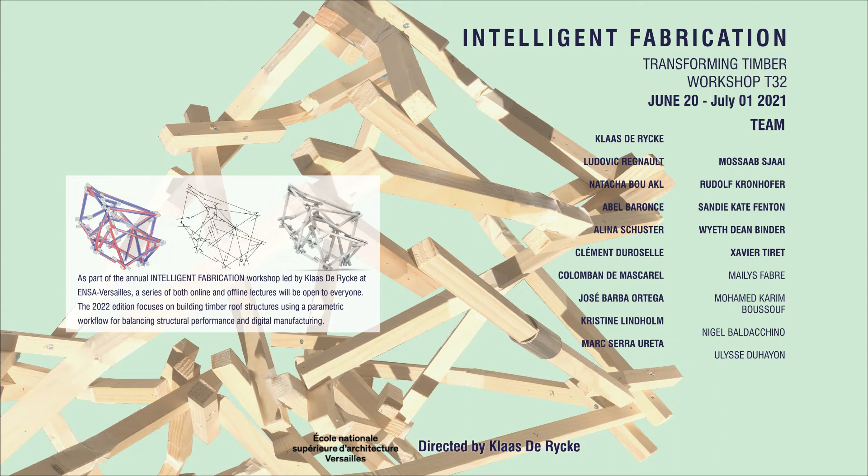This. Good morning. So let's see. Cool. You guys see it already. That's good. And now I think I have to share my screen. You have to stop sharing there. Yes. Yeah, that looks good.

Maybe can I ask you? It's the last session, so normally there's a good trick. What I do when I go to a conference is I always need to think that I have at least one question. It makes me stay awake during conferences, actually. So it's just a good trick, and try to have one.

I think it can be interesting for the last one that we have a little bit of debate about also different lectures maybe that you have seen now about the transforming timber. And it went from very detailed, people that are working on the timber itself with a factory and what challenges they see ahead, to the very intellectual approach on timber, and even the ones from carpenters, how they see the evolution of timber at the moment. So I think there's quite a lot of aspects, and I think you will also see it back in some of the reflections that Oliver can bring us today.

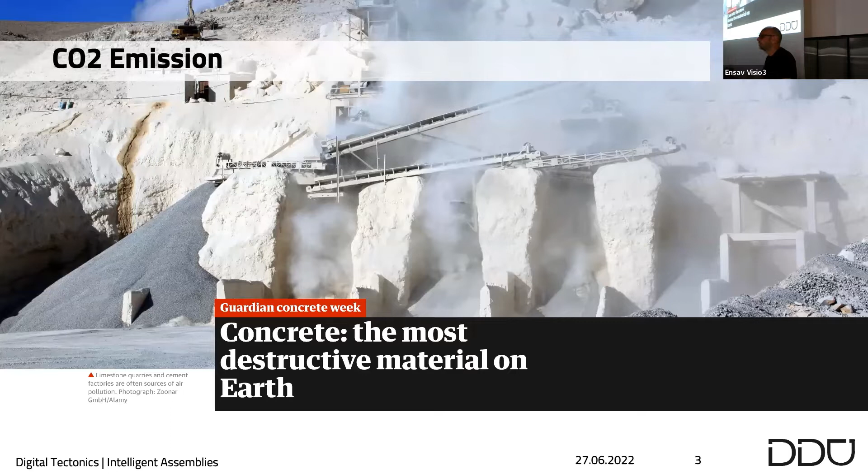So our discipline, the architecture and the construction industry, are key in how the future will unfold. And this also becomes more obvious in mainstream media. People are discussing that, and you have been working with timber in the past 2 weeks intensively, and it makes a lot of sense if you read that headline from The Guardian from 2019 already. I would like today to talk about the use of concrete as well, but how we can maybe find different ways of using concrete, of reusing concrete, and how a modular design and fabrication strategy can help to keep material and building components in the loop.

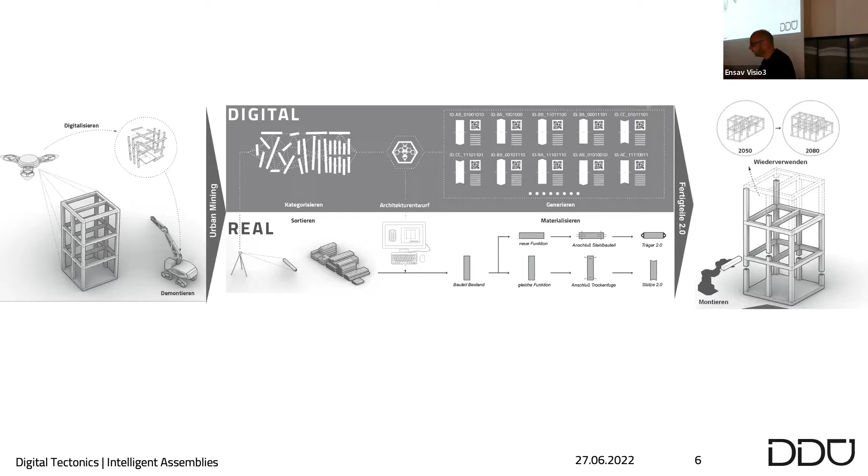What we do at university is we write grants to get money to do research. We proposed this idea, and while waiting for a committee to decide whether we get that grant or not, we were exploring this idea with the students at the TU Darmstadt, and there was Jianpeng Chen, who did his master thesis on this topic, saying, well, what if we take out building elements, and he proposed to urban mine them and build new structures, in this case, a bridge.

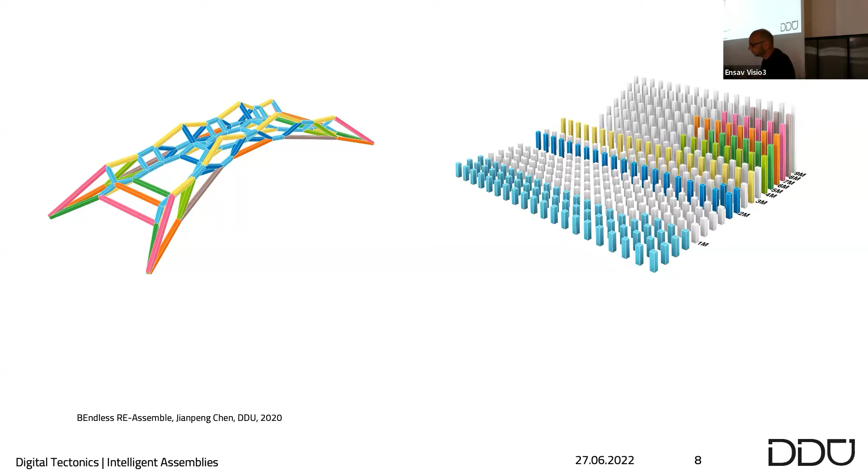So on the left-hand side, there's a bridge design. On the right-hand side, there's a material stock, and then he would see which of the building elements he could use to realize that bridge. But he also said, well, we can do more. We cannot maybe only do a bridge, but we could also design a roof or a tower with these existing elements.

And well, since you never really know the amount of steel reinforcement that is in such an existing concrete element, you rather design a structure which is only exposed to compression, because as you know, concrete can take a lot of compression, and it's not so good in taking tension forces. That's why the steel is in the concrete. But if you don't know about the amount and the quality of steel, you rather design compression-only structures.

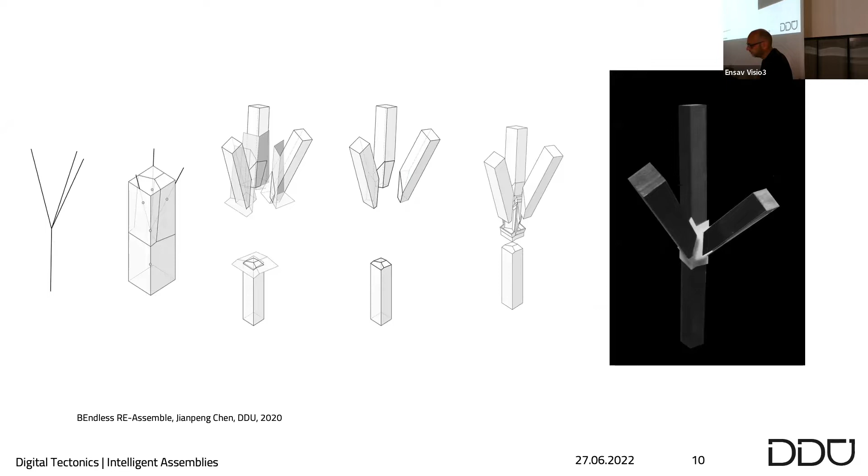Furthermore, you need to recombine these linear elements that have previously been used as columns. And so he came up with a geometric system to develop a node logic. In this case, he 3D printed a connecting piece, and then he jumped from his design part to the fabrication part, and he used our small robots, and he brought this table saw into our lab, which was terribly loud, but he kind of invented the entire process with the material feeding system, bringing him the elements,

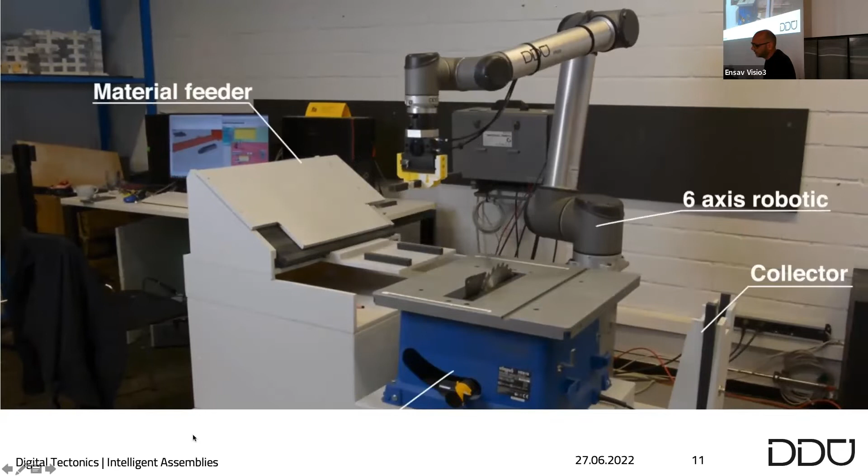and then the robot, as you have just seen here, takes the element and cuts it in a kind of a weird angle. That's what the robot is good for. It can place an element in a very precise geometric orientation to make these cuts.

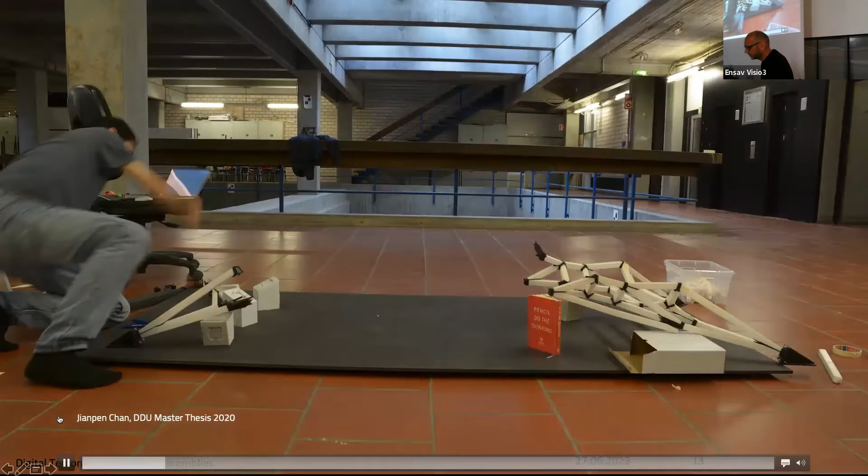Then you get a lot of linear elements, and then he 3D printed these black nodes, and finally spent one day and I think also one night to dry join this bridge together. So nothing is glued here. It's only dry joined linear elements and these nodal constructions.

With other students, we tried to think a little bit larger about the topic, and maybe also in a more poetic way. Katarina Koska made a design proposal where she said, well, if we tear down buildings, we have to ideally immediately take the elements and build a new one. But maybe there's a time gap in between, so material needs to be stored somewhere. So her proposal was for an IBA competition in Basel to say, let's combine material storage with bus stops in the city.

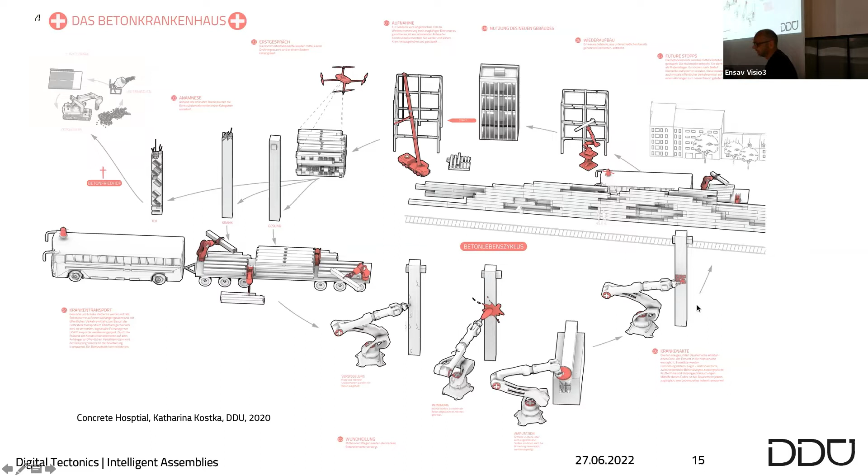She also said it's a little bit like in a hospital. If you urban mine these elements, you need to check what's the status. So sometimes they have a few cracks and they need a little bit of plastic surgery to let them look good again. Sometimes you have to amputate because it won't work any longer. And sometimes maybe these columns even die and are then recycled or downcycled for road constructions.

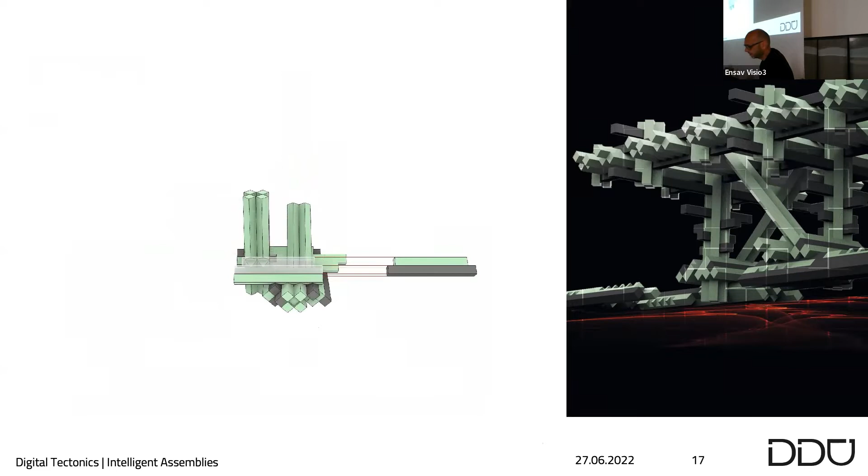But the idea is to have the element in the loop as long as possible, and to make storage also a piece of architecture intervention as well. Another group was looking into how to make subtle cuts in these columns to let them pile in a different way and to come up with structures that are maybe not so usual to find as a bus stop, but that react to the idea of dry jointing elements together and taking them apart if they are needed elsewhere.

So while we did that, the reviewers looked at our research proposal, and finally we were lucky and could start a research project that looks at this aspect. It's called Fertigteil 2.0. It's precast concrete component 2.0. The idea of taking something that is there and making it a precast concrete component again. So again, we looked at this workflow, and that workflow includes, first of all, 3D scanning.

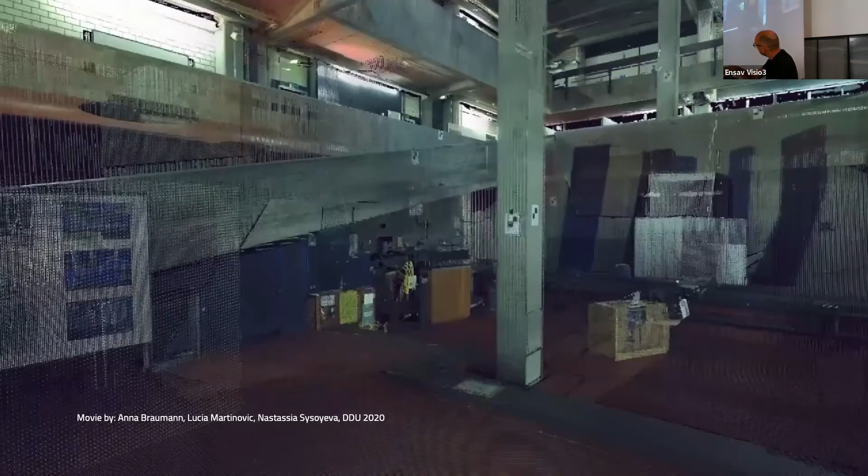This is the architecture school in Darmstadt. We have a great lobby with the espresso bar on the entrance floor. So you're all invited to come by and visit us, or maybe have an Erasmus exchange.

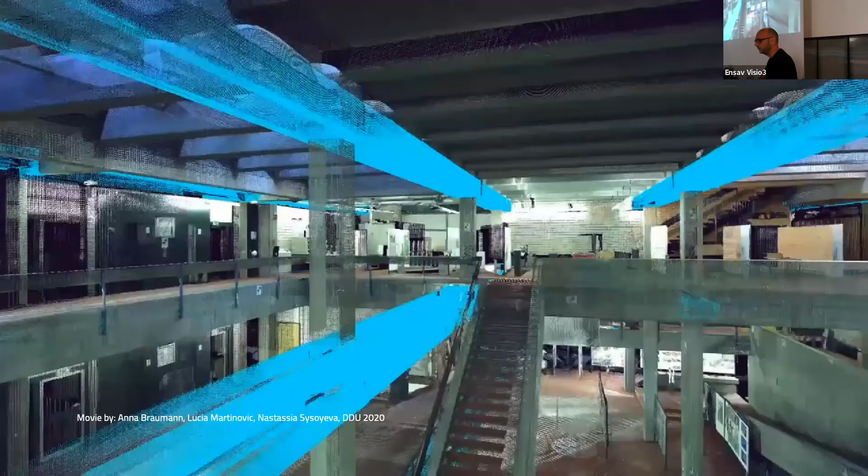And what you see here is the point cloud version of the architecture school that was actually scanned by a stationary laser scanner. But once you have the point cloud, you load it into Rhino, and you can make these fly-throughs. And we speculated about identifying beams and columns that could be harvested for future buildings in case we would tear down our architecture school.

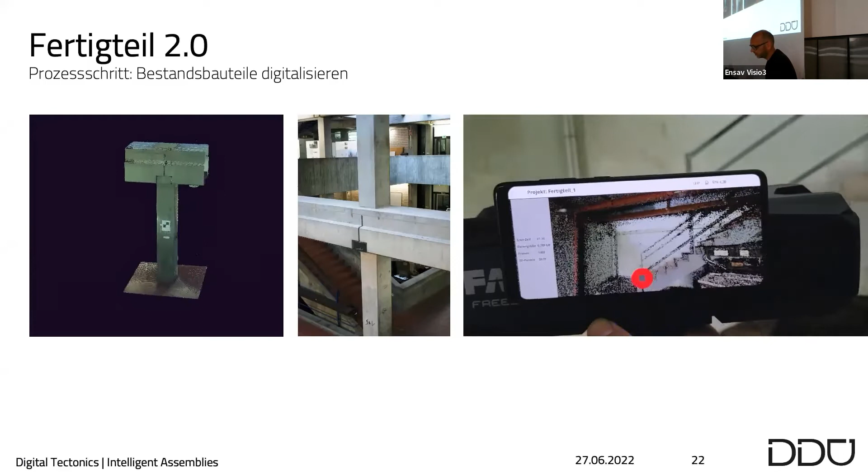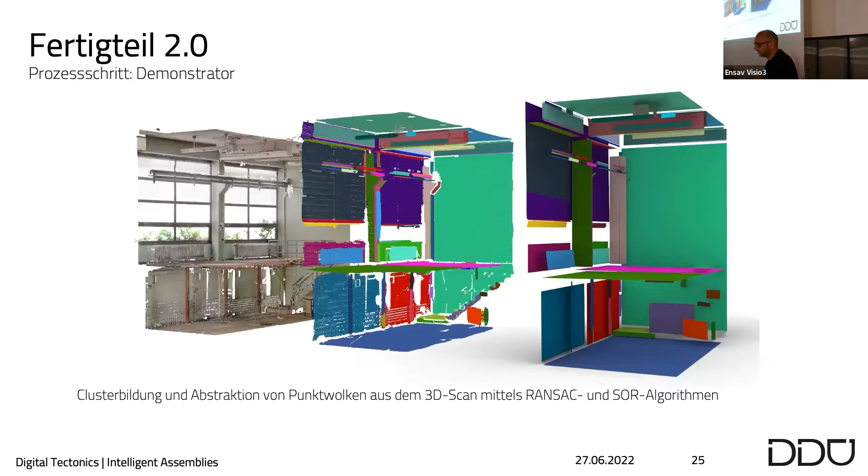In the research project, we use different tools. We collaborate with a scanning company called Faro that uses these hand scanners to produce these kinds of point clouds that look like this. So millions of points. Every point comes with a color value, with an RGB value. So you have this fascinating effect of seeing something in 3D, but if you go a little bit further away, like a photograph that dissolves once you come closer. That needs to then be reinterpreted step by step, and ideally automatically, transformed into geometric elements again.

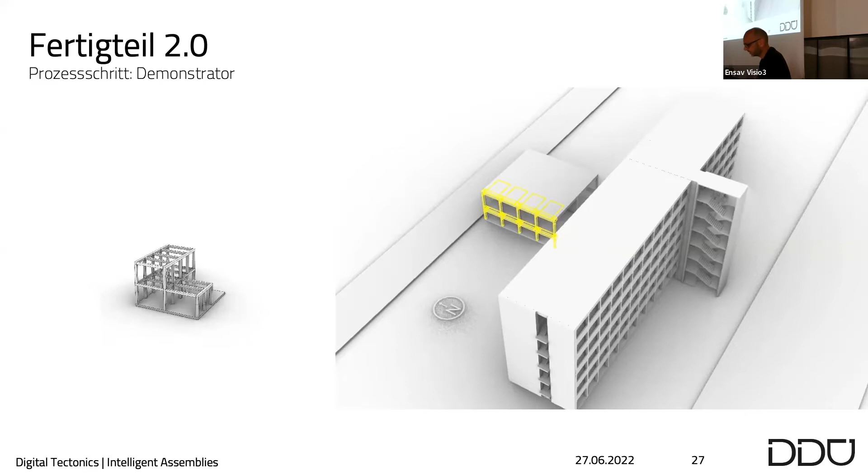And then our engineering partners plan how and where to cut building elements from a building that is supposed to be torn down. And these yellow marked columns and beams are meant to become the basis for maybe a lot of different structures in the future. So how do you then join these elements? Ideally, you join them in a way that they are easily deconstructible again. And so we do a lot of research on interlocking structures, on dry joint structures, also concrete dry joint structures that can be disassembled and reassembled.

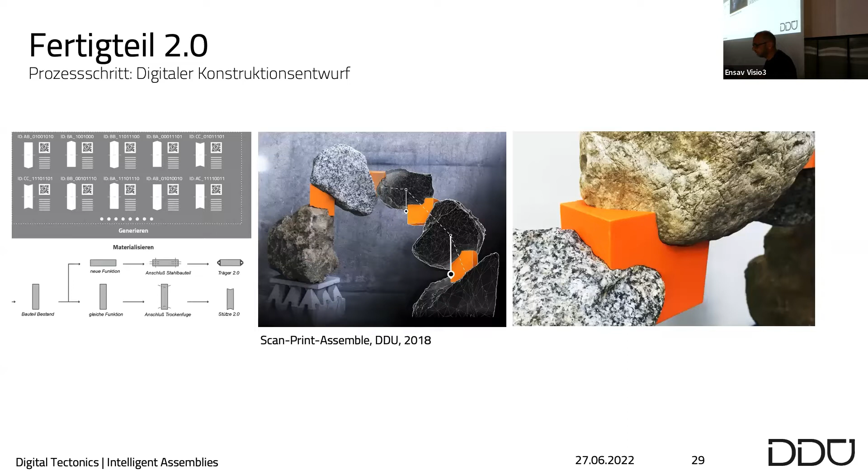We explore how 3D scanning existing objects like the stones and 3D printing together can be used to combine the existing with the new, like these orange 3D printed plastic blocks that become the perfect connectors or adapters for the structures. And we use computational tools to explore the combinatorial potential of elements. So you see here 40 elements that are combined and recombined in many different ways.

So computational power is used not to make every building element unique so that it fits only in one particular position in a construction, but we rather use computation to explore how these parts can be differently combined. And on the right-hand side, our partner Harald Kloft at TU Braunschweig and his team are looking at reversible and dry joint constructions.

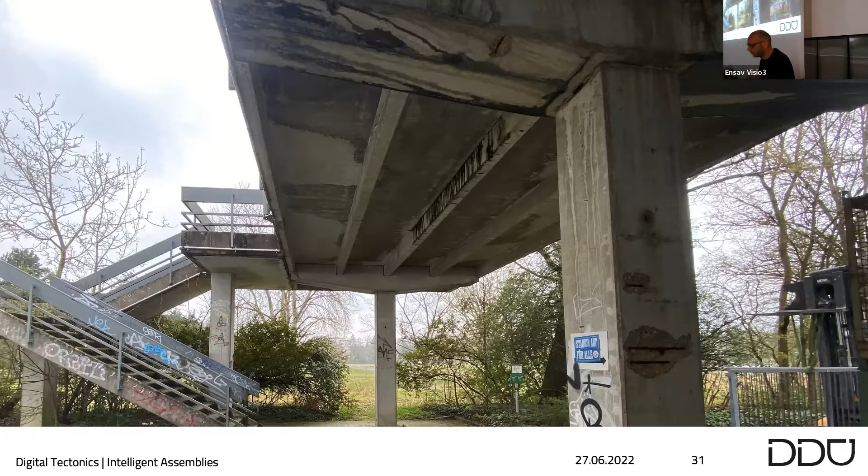What do you harvest? Well, it's not so easy, we found out, to find somebody that gives you concrete pieces. We found that at the campus of TU Darmstadt, supposed to be torn down. And usually these things, as I showed in the video, are destroyed and crushed down for gravel, for road construction. So we said, no, we would like to saw these elements, to reuse them. And we were allowed to do that. This is how it looked in between the funny leftovers of a former bridge.

And then the sawing guys come with really serious blades, and the saw with 40 horsepower. And you might have seen in the video, I'll run it again, that the column is jumping. Yeah? So we cut it on the ground, and at the same time we pulled on the top, and it was kind of flying away.

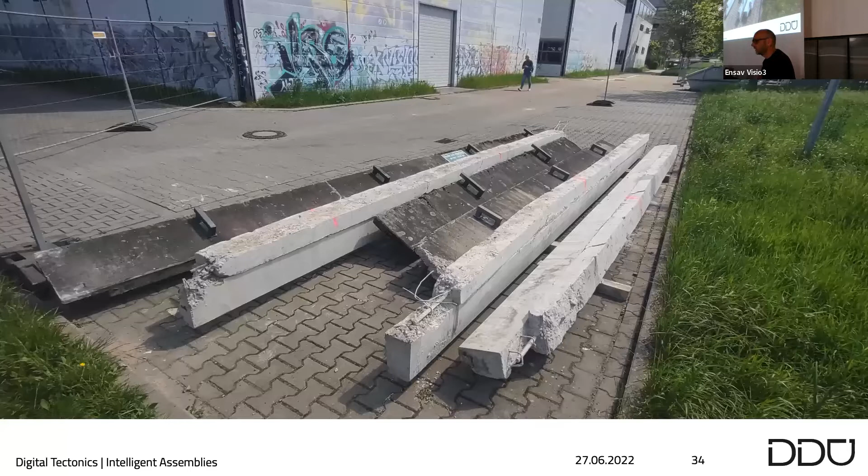So this is the stuff we now design with, and this stuff got transported into the digital fabrication laboratory at TU Braunschweig, where they have these sawing blades connected to robots to very precisely cut the elements. And the elements are cut in a way that they allow for dry joining them together.

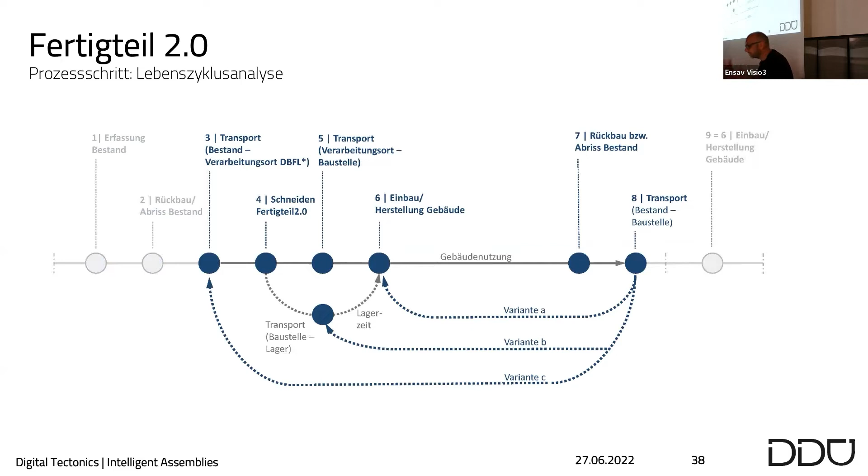If you do that, it makes a lot of sense to also assess the amount of energy you spend into it. Does it all make sense? Or do you invest maybe even more energy than building new? So this is something that we explore in parallel. There's a life cycle analysis going on that looks at the different ways of keeping building elements in the loop.

The project is facilitated by the DDU in collaboration with the ITE, Harald Kloft, and the Unit for Sustainable Design in Darmstadt, as well as Faro, the 3D scanning company that is interested in transferring these ideas into the market.

Let's assume we don't urban mine the elements, but we design new components. How can we design the components in a way that they can be used for assembly, disassembly, reassembly? And what does it take to assemble those elements together? That's something we look at in another research project called Tactile Robotic Assembly. And it is about how we can use robots to ideally autonomously assemble elements and disassemble them and reassemble them.

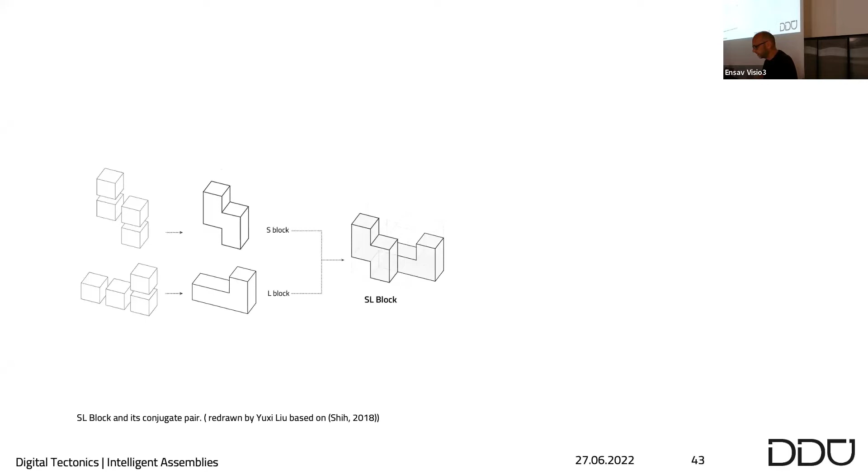One important starting point is the module, and this is one we didn't invent ourselves, but it was invented by a researcher called Shen-Guan Shih in Taiwan, and it is called an SL block. It's a module that is made from 8 voxels. 4 of them form an S, 4 of them form an L, and together you get this weird thing, which is called an SL block. And you can combine 2 of those SL blocks, which is called an engagement.

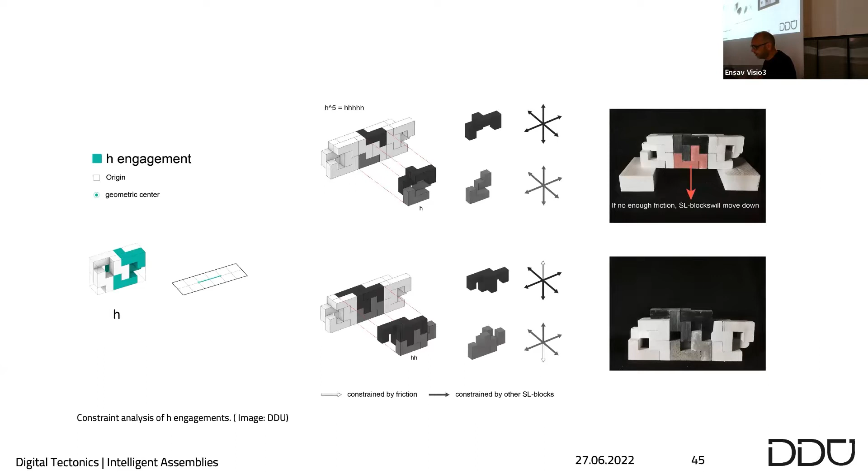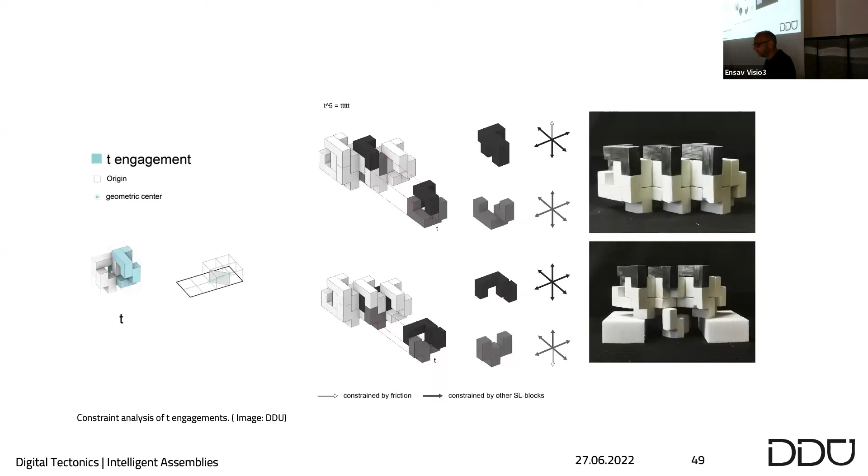And what's interesting is that these elements can be combined in many different ways. So you can create linear interlocking structures that allow you to span. So maybe that could become a beam. You have other forms of combinations where you rather create closed blocks, like these cubes. There are cantilevering structures. There are spiraling structures. I'll rush through them. But yeah, the message is you have a very repetitive and very simple module that can be assembled in very different ways.

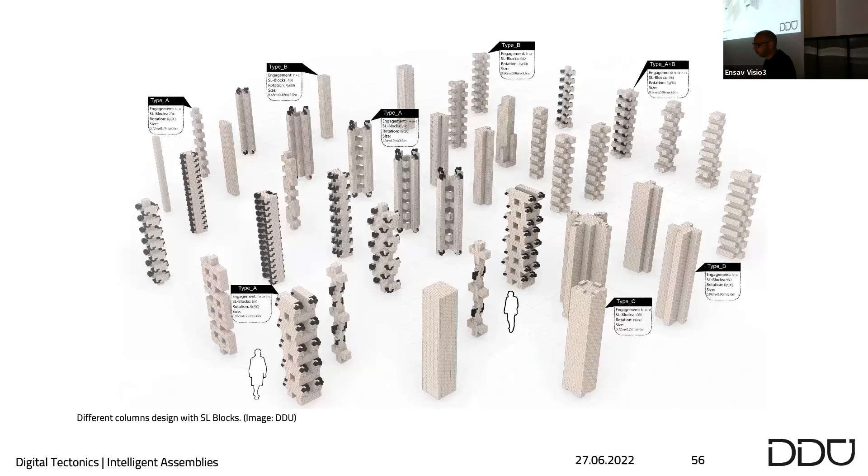And you can then also combine these different engagements and make larger configurations that create all sorts of sometimes weird, but sometimes also very basic forms. So taking that as a starting point, you could think of building elements like columns or walls or floor slabs in a completely different way. Usually we see them as one continuously cast element or a timber element.

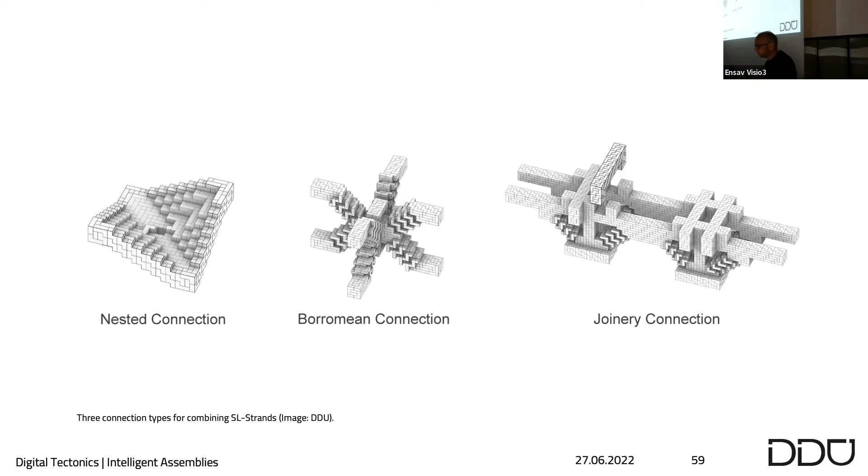In this case, we see building elements made out of thousands of those modules, always dry joined together, which means that they can be disassembled and they can be reassembled in completely different shapes that I'm rushing through now.

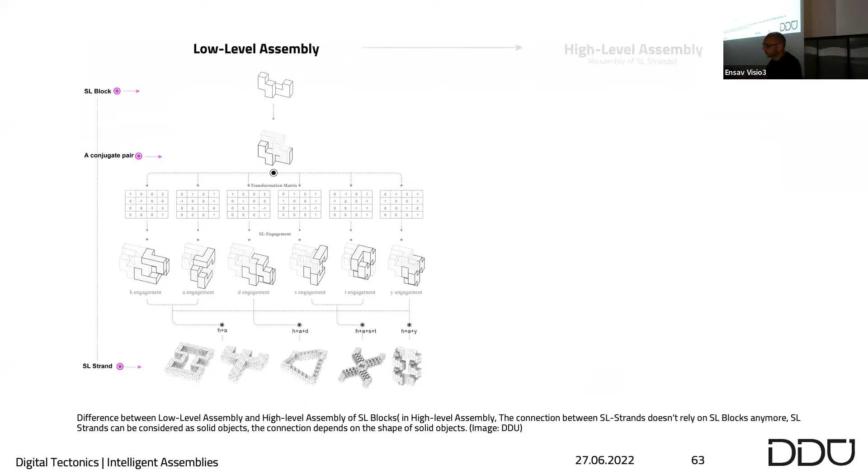One thing that is interesting about it is that you could start with this SL block as the basic unit, and you can go through all these different levels of the engagements of the SL strands, and you finally come to a higher level assembly, which creates building components like beams or columns that could possibly be integrated into much more conventional structures than the ones that I've just shown. So you can create this kind of sculptural elements, but you can also create very simple beam-like structures that could be used in existing structures.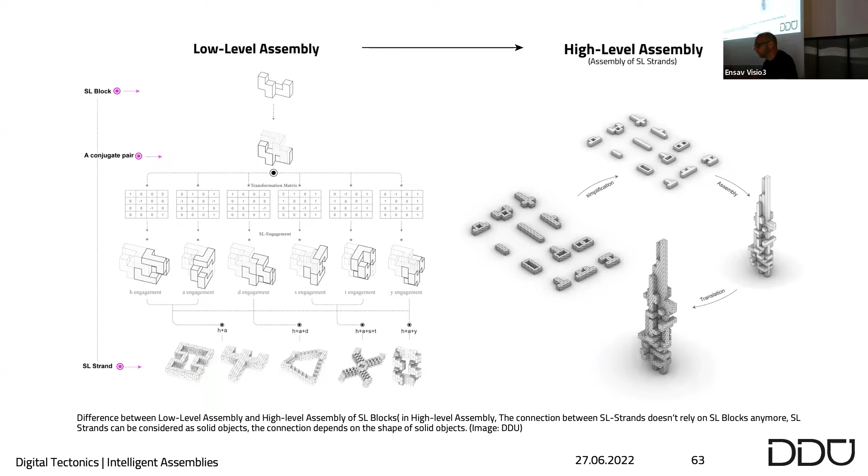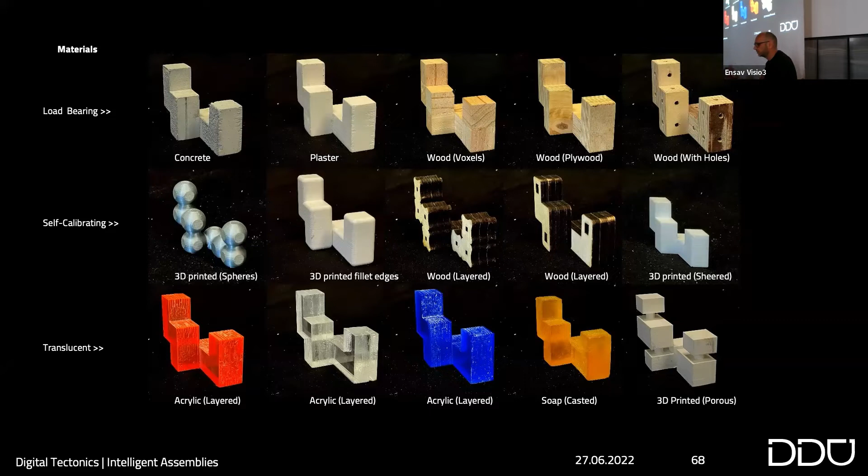So the element is repetitive, it's not changing, but what can be changed is the material. So we produce quite a lot of these SL blocks from various materials. We looked, of course, at concrete, but also at wooden structures. We 3D printed them. We used acrylic to have translucent or transparent elements. And the common denominator is that they can be assembled into coherent structures while changing the material.

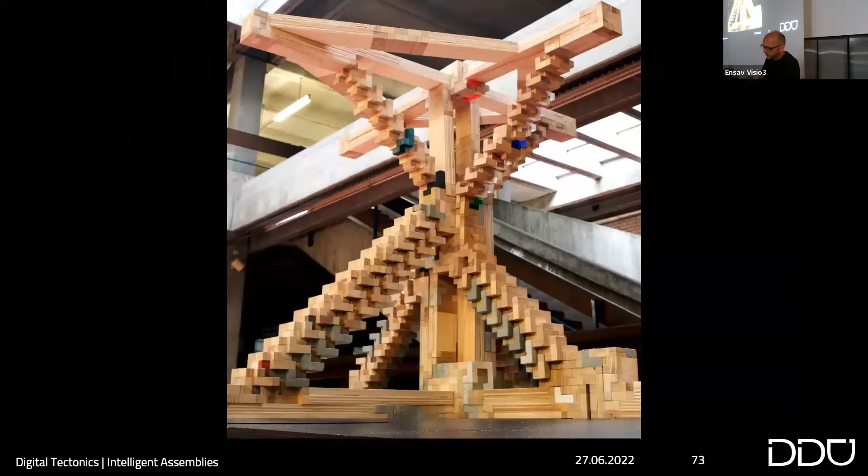Here it is a bit of a random configuration, which I think looks beautiful. It's not responding, for example, to structural needs, but you could think of structures where, in zones of compression, you would use concrete elements. In large spanning areas, you would rather have lightweight wooden elements, and maybe you have ones that regulate humidity or direct the natural light in different ways. Eugene Liu explored that as his master thesis, and he built this kind of demonstrator in our building, and is now continuing the same topic within the research project Tactile Robotic Assembly.

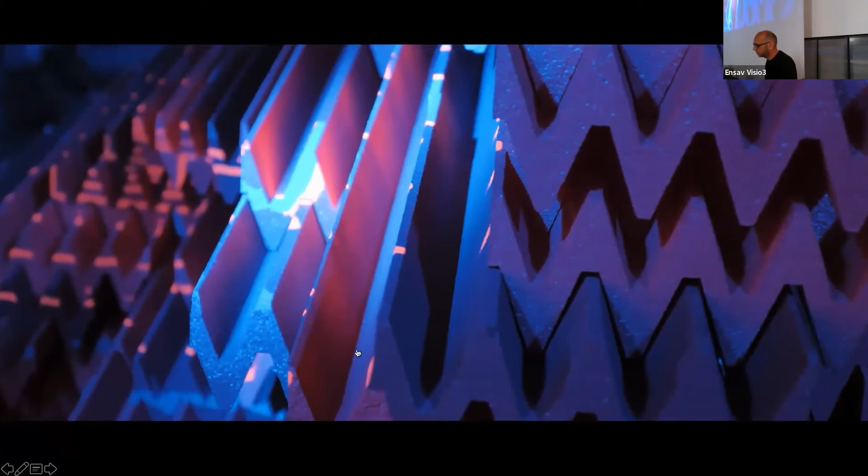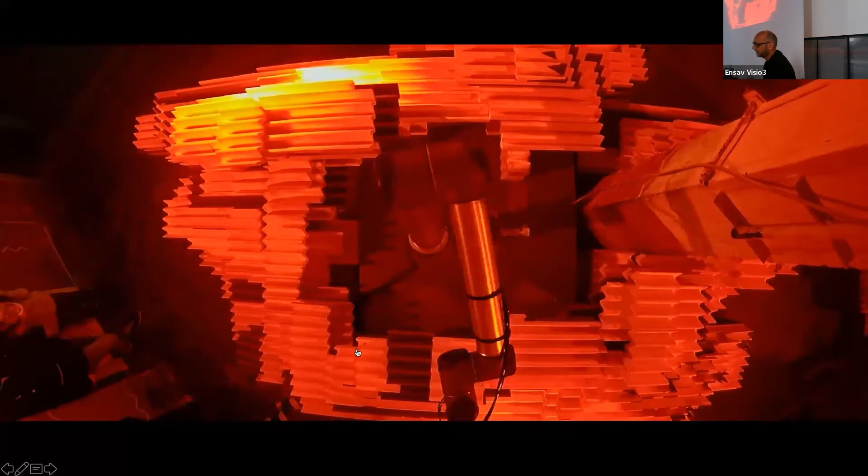One project where we looked at assembly and disassembly was an installation for a light festival in Frankfurt, where the robot was part of a kind of installation sculpture made from these foam blocks, and the robot sits in the center and is constantly rearranging this setup. And you can see there are these words that are projected like an anamorphic projection onto this installation, and

the word is changing its meaning when the light is changing its colors. You can see act and react, but you also have this robot that is constantly rearranging the modules and puts them in different places. You can also see that these blocks are super lightweight. They are designed in a way that they fall in place. They kind of self-calibrate when they are positioned. So that was all done by a blind robot, pre-programmed by us. That was only going through a pre-programmed sequence of assembly and disassembly.

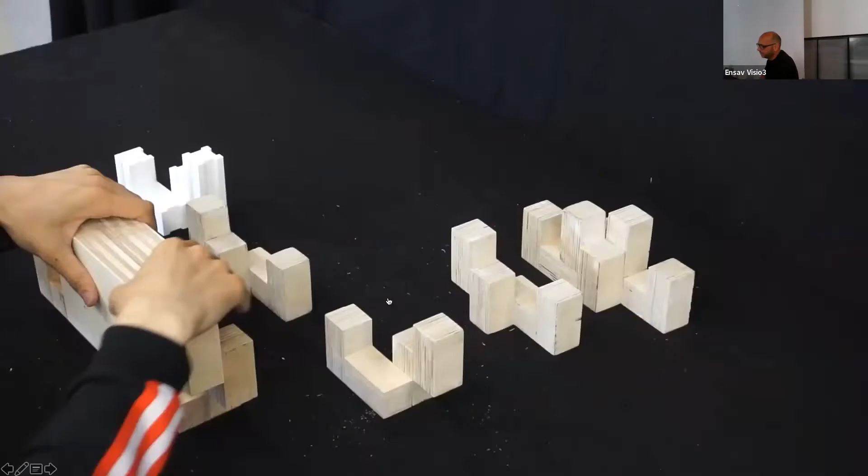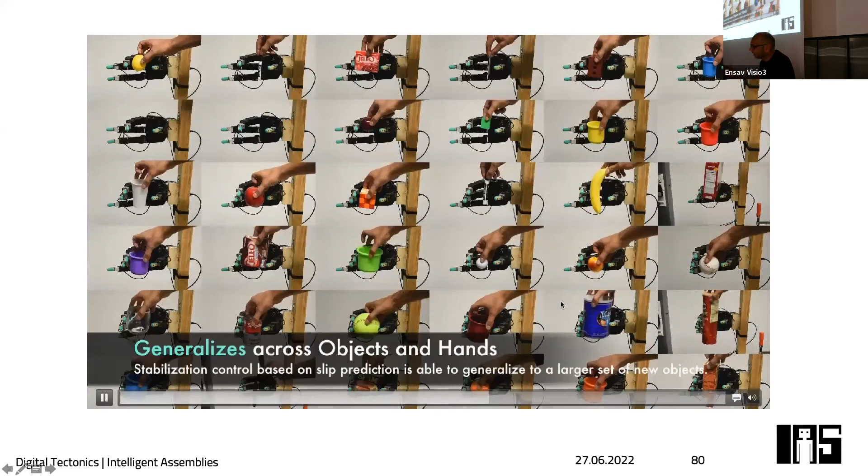If you look at the SL blocks, then you see that the assembly is a little bit more tricky here. There's quite a bit of friction involved, so it requires tactile sensitivity to combine them together. And that was the moment where we teamed up with roboticists from the TU Darmstadt that are exploring tactile sensing. And you can see some of their experiments here. There's this robot hand that has fingers with a tactile sensor that knows whether it has a heavy element, which is hard, or whether it's grabbing a soft element and it should not destroy the element when grabbing it.

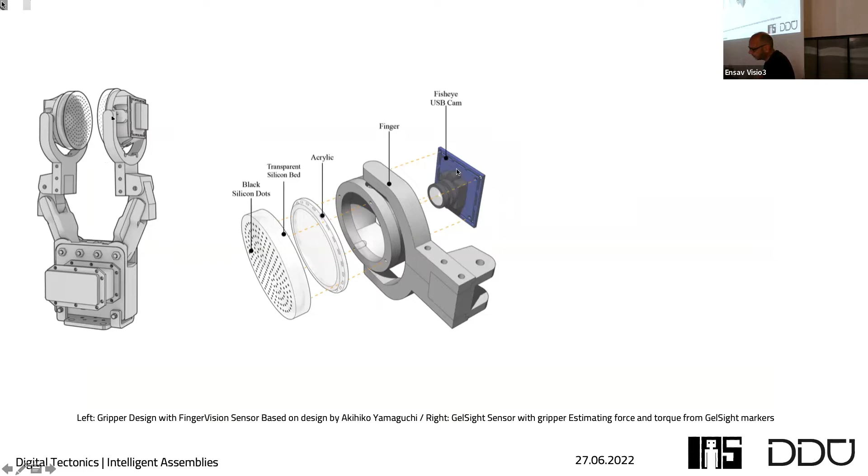In our project, we used a different system. You see the gripper here, and tactility is combined with image processing. So you have a gripper that grabs something, and it's equipped on both sides with a gel pad, which can deform and has these black dots. And when it grabs something, this pad deforms, and this deformation is then recorded by a small camera that sits behind it. And you can see that here. So different forces create different deformations of this dotted pattern.

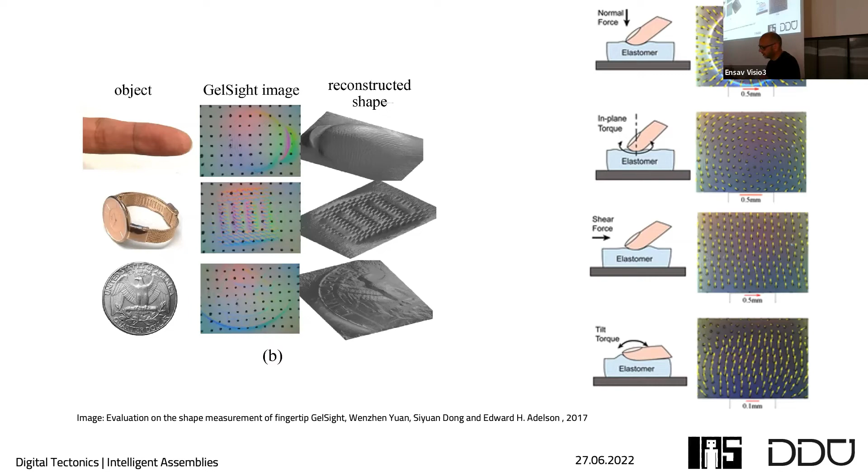And this system then uses reinforcement learning to interpret the images and the deformation of this pattern to develop an understanding of what it is actually seeing. So through the deformation of this gel pad, the system is able to reconstruct the surface structure of the object that it is grabbing, or it also develops an understanding whether something that it grabs is maybe slipping or moving.

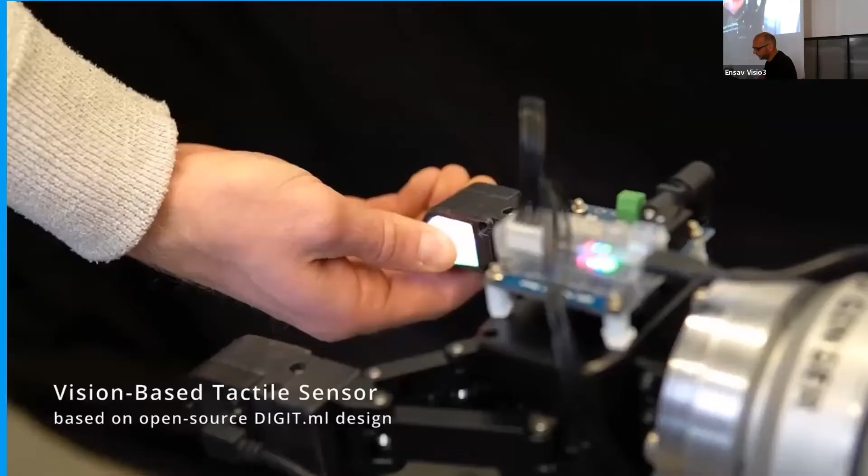So this was the starting point where we said, well, if the robot knows what it grabs, that's cool, because then we don't need to sort the concrete blocks from the wooden blocks, from the foam blocks, just taking one and checking how heavy it is and knows whether it's the one it needs to have or whether it needs to grab a different one. This is a different gripper, but same technology. And you see here that image on the screen that is the result of the movement of this block that is just grabbed. So this allows us to tell the robot what's going on while assembling.

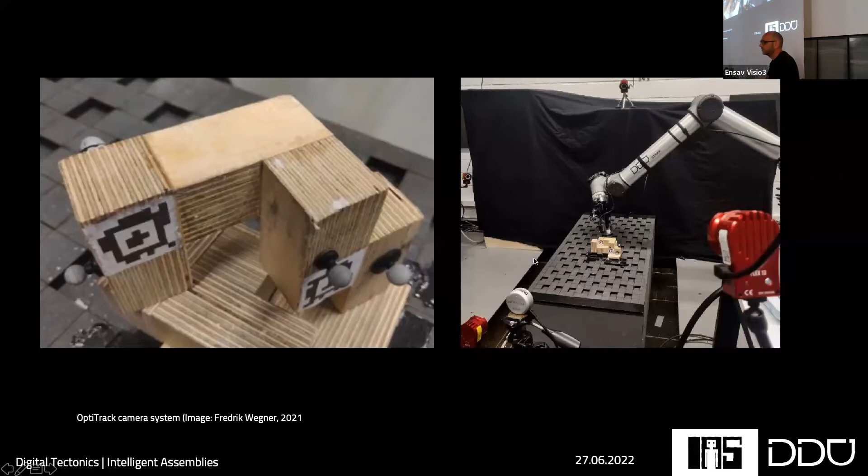If you move elements around, it's also good to know where they are. So you need a tracking system. What we used here are two things. One are these April tags that are glued onto the elements, and then you see these gray dots, which are reflective dots for a camera system for motion tracking, and that allows us to digitally record how elements are moved through space.

And then it's playing, and there's a camera system that tracks the ball. And whenever the ball hits the table, the robot gets a reward. Whenever the ball does not hit the table or goes into the net, it gets punished. And through this reinforcement learning process, the robot suddenly is able to play table tennis without understanding what table tennis is. It's just the reinforcement learning and the rewarding that helps him to do that. And we thought that is a great approach that we could also maybe use for assembling modules.

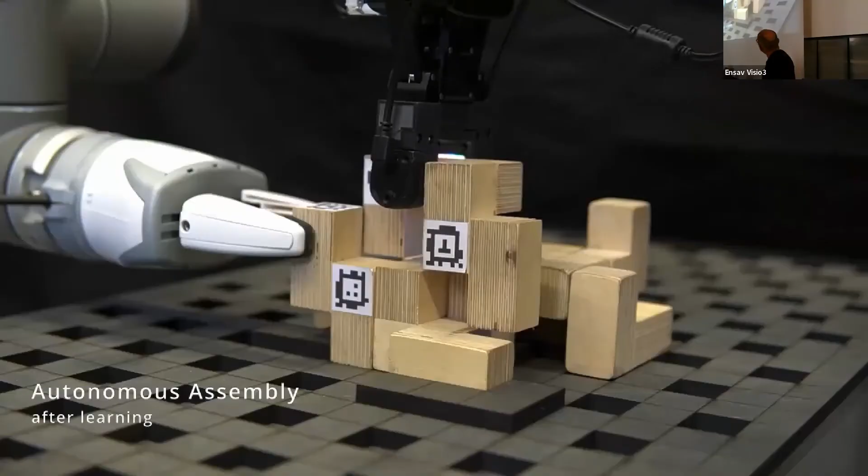And then the next step is we let him do it on his own. So the robot is assembling. Whenever there's a collision between two parts, and maybe whenever there's too much friction between the elements, then you can imagine this gel pad in the gripper is deforming. And if it deforms too much, then the robot is stopping and tries to approach the assembly procedure from a different angle.

And again, we have a rewarding system that rewards kind of smooth assembly and that punishes too much collision or too much friction in the system. So it's the human demonstration that is then followed by an artificial reinforcement learning process.

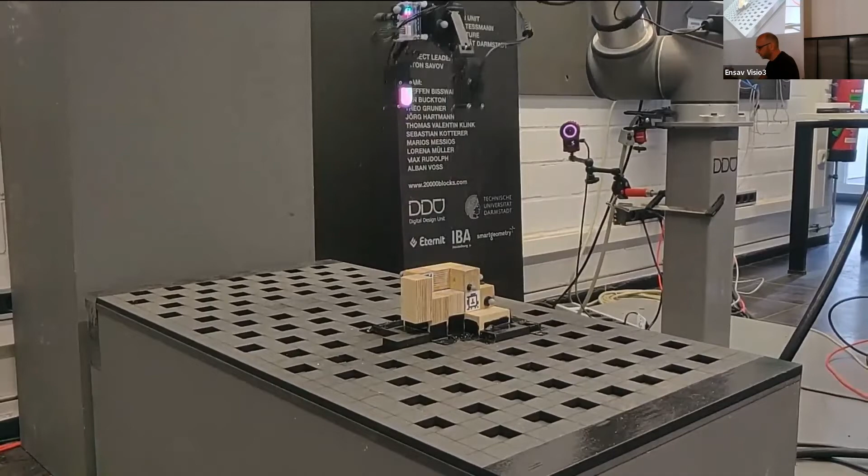What we are currently looking at is, on one hand, to use the tactile sensors, and on the other hand, a new generation of robots, like you can see on the right-hand side, where every joint is equipped with torque sensors that can also measure whether there are any high forces during the assembly process. We try to combine the tactile information with the other sensors to improve the process. You need a lot of cameras, of course, to look at the element from every angle.

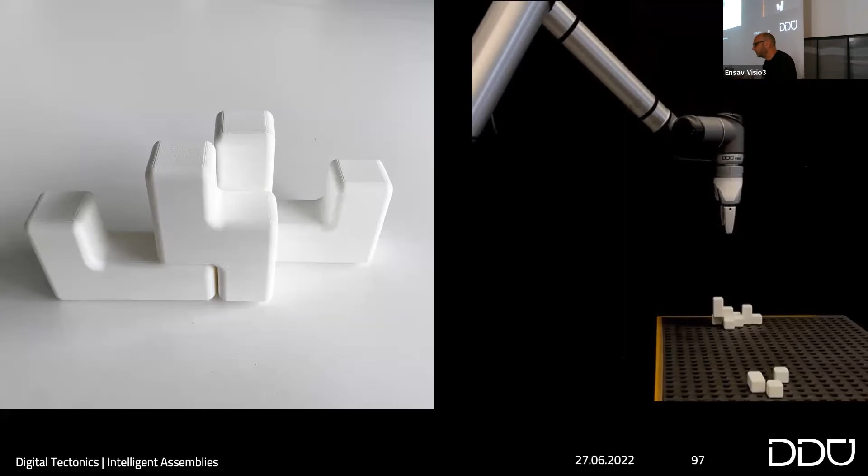While this is the job of the computer scientists and the roboticists, we do the same in parallel in our architectural robotic lab. But what we do is we slightly redesign the SL blocks so that they are a little bit easier to assemble. You see these rounded-off edges that help to maybe self-calibrate, that reduce the friction during the assembly. And to test that, we use our blind robots, not equipped with any sensors, to put these elements together.

So the idea in the project is to really approach it from two sides. One is the robotic sensory process, and one is to design elements from an architecture perspective that are made to be assembled by the robot and not by humans.

And let's say if we manage to do that, maybe this is the element size 1-to-1. We are not currently interested in scaling up the building block, but we say, well, maybe we build a column that is made out of thousands of these elements, but we have autonomous robots that work 24/7 and assemble and disassemble these elements, and the time they need is no longer the decisive factor.

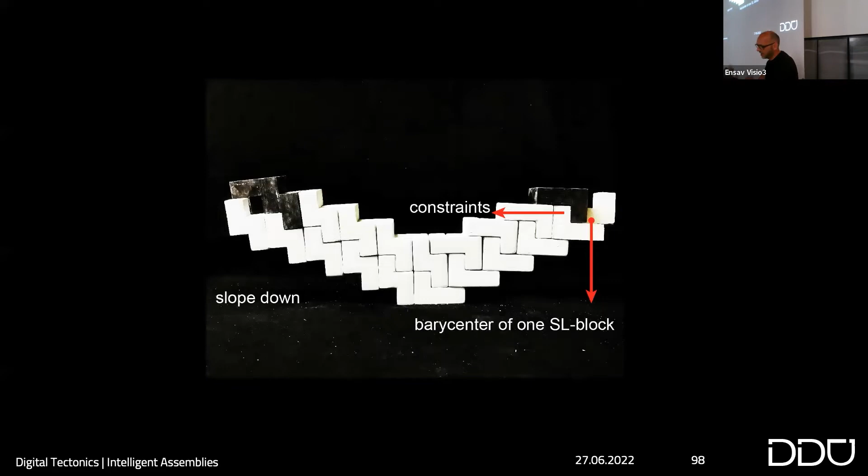There are challenges ahead. You can see tolerances add up, and tolerances are not really welcome in such a system that relies on friction. We are currently also looking at post-tensioning the elements, so having cables that run through them to make them more stable.

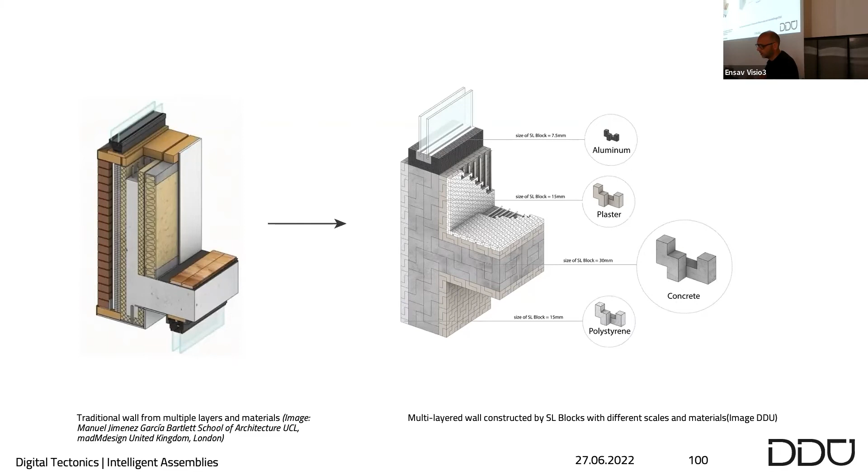But we also think of how we can translate an architectural construction that is made from all these different layers into one that exclusively works with one geometric system, but that is differentiated in its materials. So you have insulating SL blocks, load-bearing SL blocks, ones that might even become the frame of the window. And of course, we could imagine that elements in our architecture department are no longer continuous, but are made from these blocks that, if they are not used anymore in the future, become something new, like the bridge, for example.

This is a project that requires not only architects, but also our friends from the robotics and computer science department. And it's actually a very inspiring interdisciplinary collaboration that we are currently working with.

The last project I briefly would like to show is a studio that we are currently running, and it's called Animate Concrete. It tries to explore the idea: imagine we have this world where everything can be assembled, disassembled and reassembled. What could that mean design-wise? And what should that mean for concrete elements if they are meant to be moved around? How do we as humans interact with them? And can we think of different kinds of spaces in construction there?

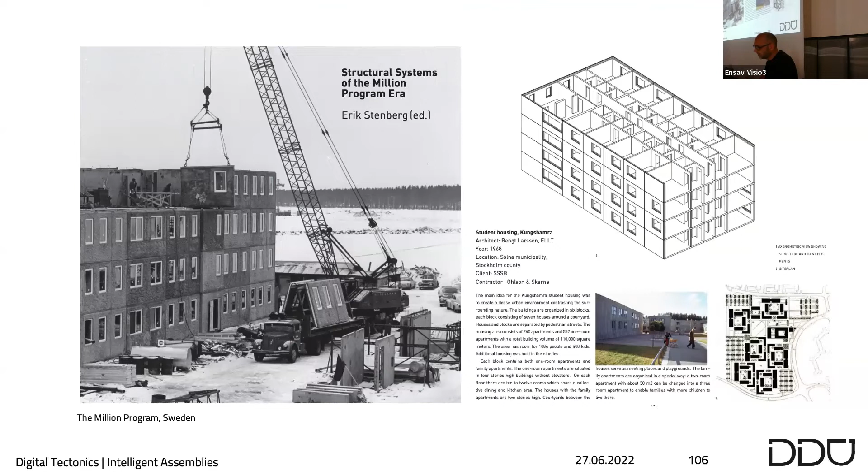For example, in Sweden, there was a million program where in one decade, one million apartments have been built with precast concrete components. And well, we should all not fly so much because, you know, CO2 emissions, and we think also concrete elements should not fly, but they should rather walk. And so this was the starting point for us to explore whether we could have elements that move. And the way we do it, I'll show that in a minute.

What I think is interesting is that 2019, 1968, there's almost no innovation in concrete in 50 years. So we should really, as a discipline, think whether that's really the way to go into the future. And if you look at the flying panels, well, what has been a positive vision is just the everyday construction site. So we were wondering, what if panels not fly, but if they walk and maybe they roll around, they are again dry joint. So can be assembled, can be disassembled. And this is what we are currently looking at with our students.

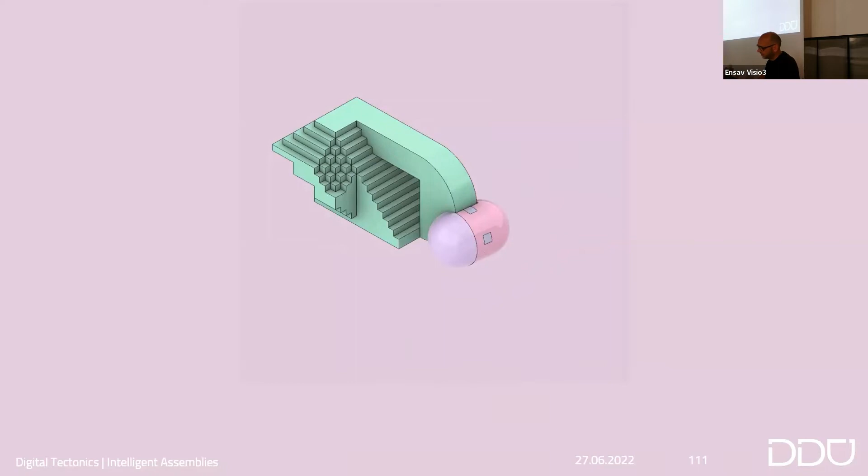And one technology that we developed that is in use here is the rotoforming of concrete. You know, where if you get these chocolate Easter bunnies, they are hollow. And the way it is done is you have an Easter bunny form made out of two parts. You put a little bit of liquid hot chocolate in, you close the form, and then you rotate so that the liquid chocolate is spreading all over the surface of the form. We try to do the same with concrete. You can see that here.

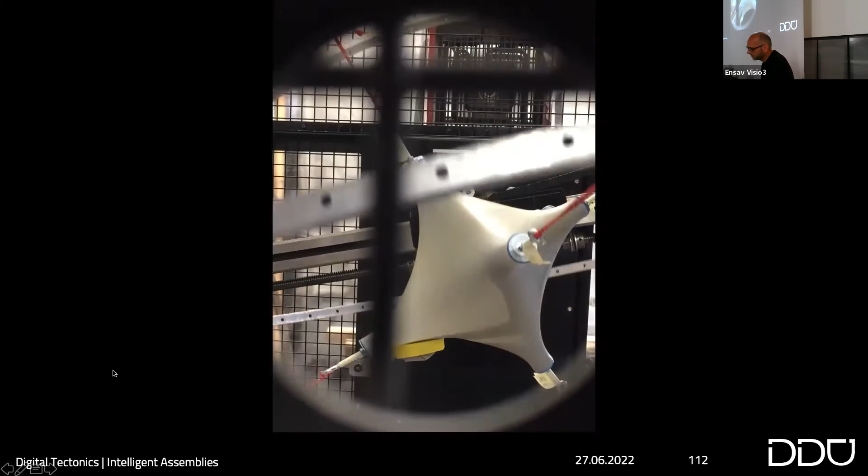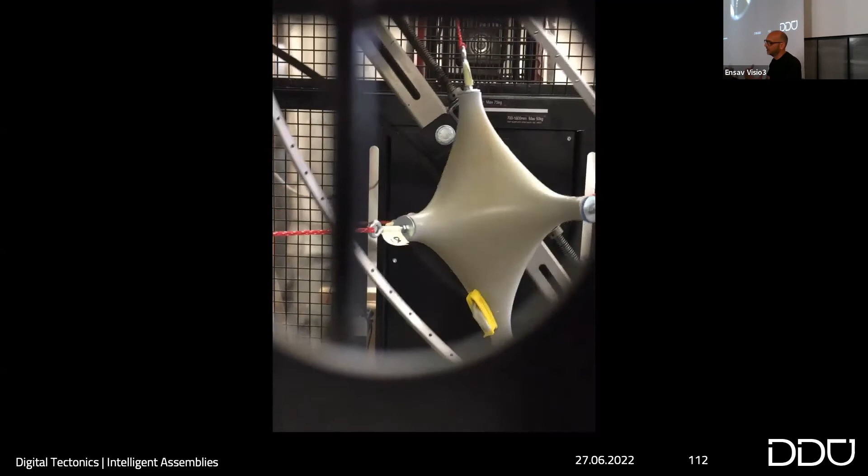And what's interesting about the process is that you, of course, use a lot less material because the elements are not solid, and having less concrete means in the casting process that you have less hydrostatic pressure on the formwork, which means that you can have super lightweight formwork as well. So the idea would be to save material for the formwork itself as for the concrete element in itself.

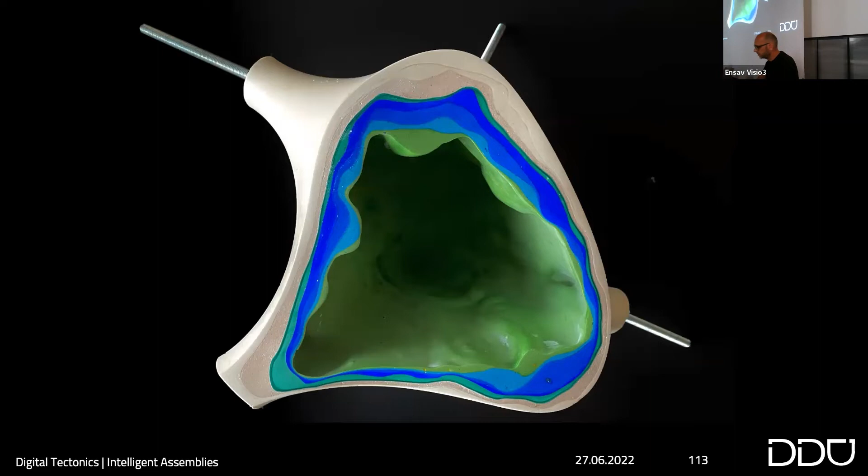Here, this is concrete. This is a latex balloon, a large one that you use for birthday parties, that is pre-stressed in different directions, and that served as the formwork for this concrete element that you can see here is produced in various layers. So it's a kind of additive procedure where layer by layer is filled into this node. And we consider that to be maybe the node of a spatial space frame structure.

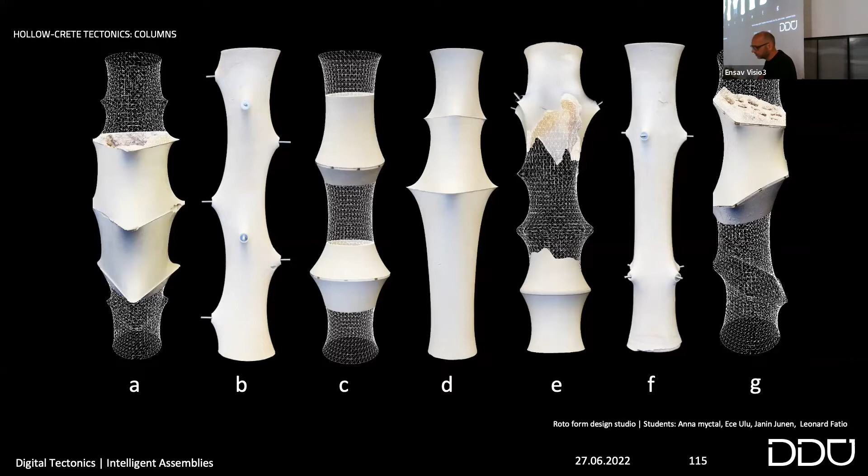Again, with students, we explore what's possible with this kind of fabrication technique of rotoforming. Students were simulating this pre-stressing of the membranes, and then we're casting, and you can see sometimes it works out, sometimes elements break. That's research, that's experimenting, but you can also see how the digital prediction of the behavior of pre-stressed membranes kind of fits to what really happens then in physical reality. So there was a group looking at columns, a group looking at panels, ceiling panels, floor panels, beams, modules, and so this is how we did it.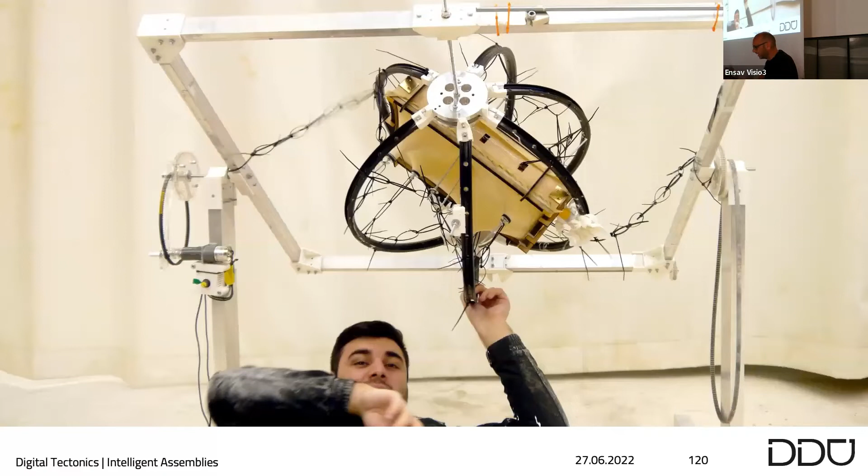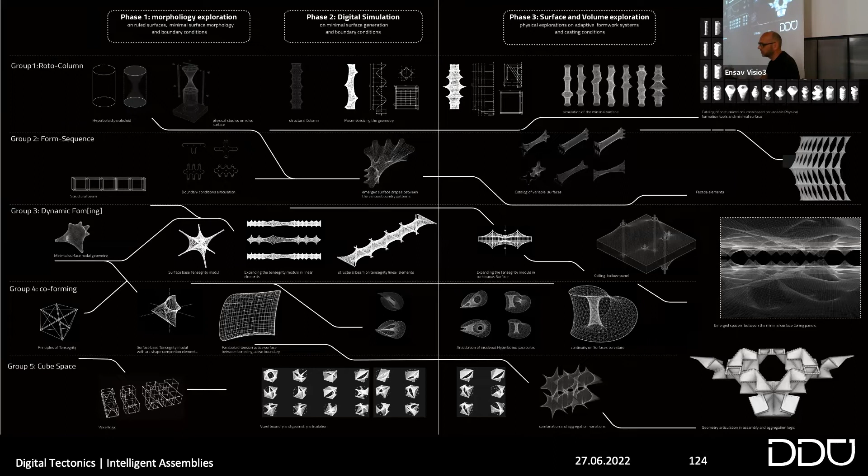We kind of invented our own machines and we're crawling underneath them to fabricate different kinds of elements that then ended in an exhibition where you can see on the panels in the back, there was a little bit of process documentation. There was also a speculation of what could that be as a building element. See a lot of happy students after intensive workshop time, but also a kind of map that was reflecting on the different building elements that were produced there and what they could become in the future.

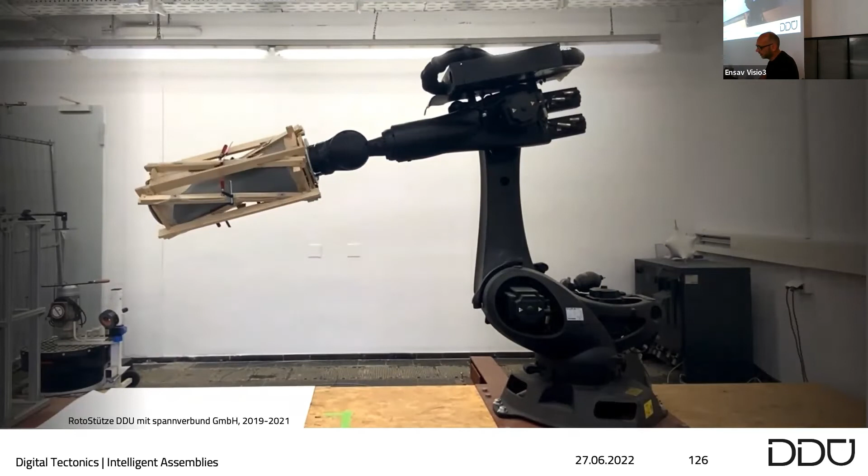Was quite a bit of manual work. See, it's a little bit like in the bakery, rotoforming by hand, but in the next step, we scaled up the process, got a bigger robot, and teamed up with an industry partner to produce hollow column segments, again with the membrane formwork, twisted elements that you would otherwise produce by probably milling the formwork out of foam to generate this kind of complex shape.

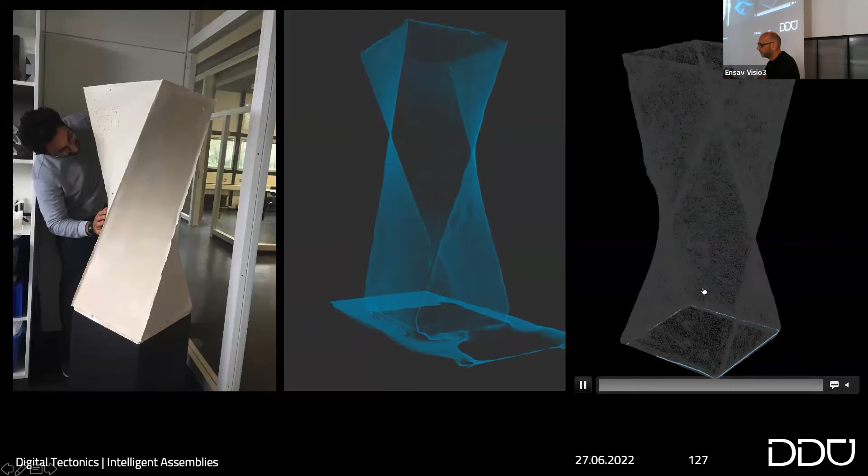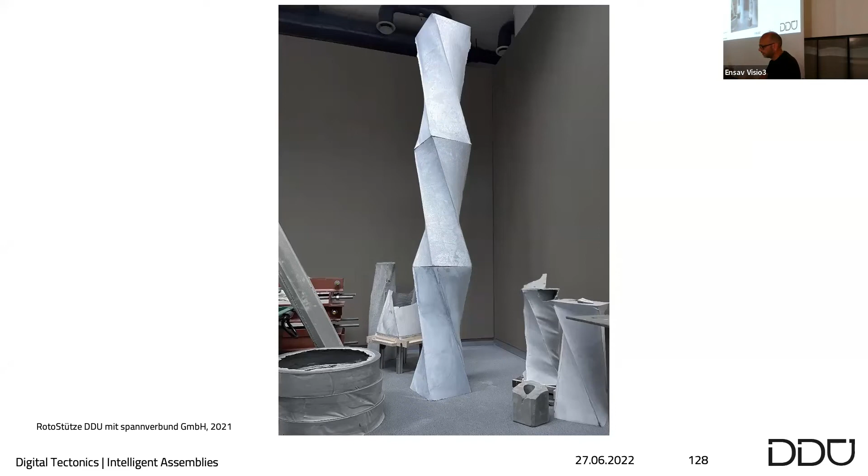Whenever we produce something, we 3D scan that and we compare it with the digital model to see how much the physical form deviates from the one we planned, and that led to a prototype of this twisted column that is hollow, and that could then in the next step, in this case, just be working as a permanent formwork for a more conventional column. So there's no reinforcement involved here. It's just the outer surface for a load-bearing column to come.

What becomes very clear is that this entire thing is a material system that requires knowledge of the material behavior of the formwork membranes as well as the concrete. You have to develop the machines or develop the robotic trajectories to do that. And of course, you have to have a digital design process to make all that happen. And all these three steps cannot be separated from each other, but they are part of one coherent system and workflow. Students then speculated what it could mean for architecture if this would be available in one-to-one.

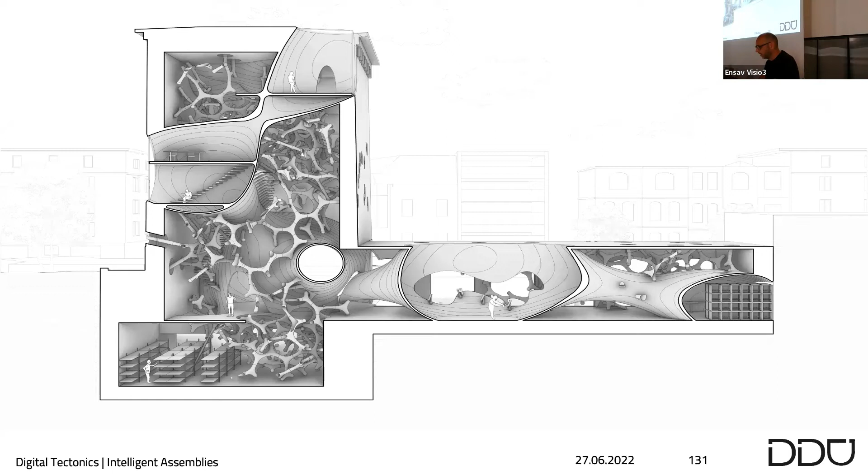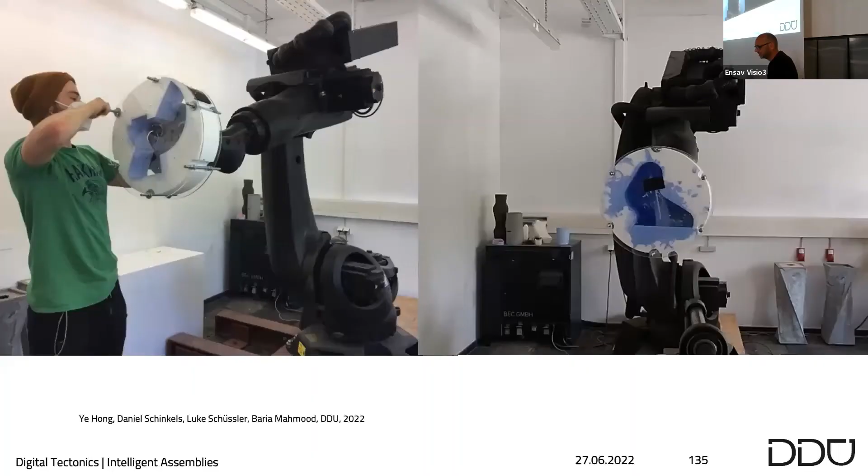Now imagine if you have a hollow element that comes out of the rotoforming process. After you have the hollow shape, you can still fill in some concrete here and there. And with that, you can control the location of the center of mass of something that looks massive, is actually hollow, and behaves in a kind of weird way, maybe like this thing. So this is what we're currently working with. You can see here the rotoforming process, the liquid that is spread all over the surface, that then leads to elements that are massive here and here, but they are hollow here.

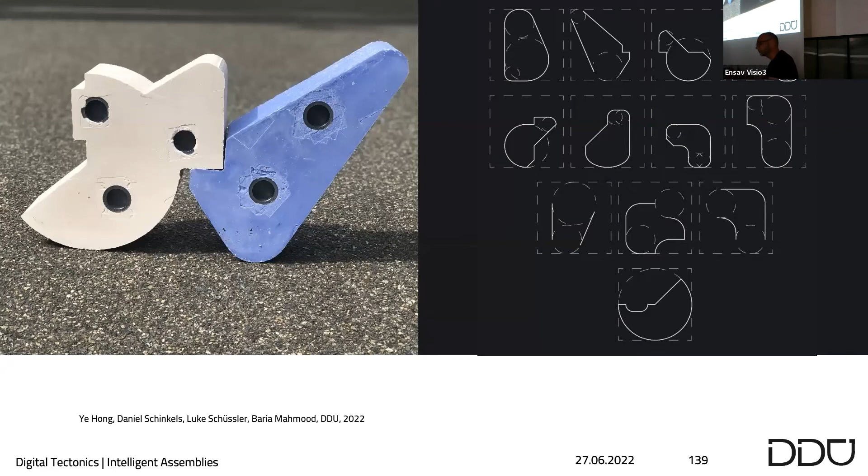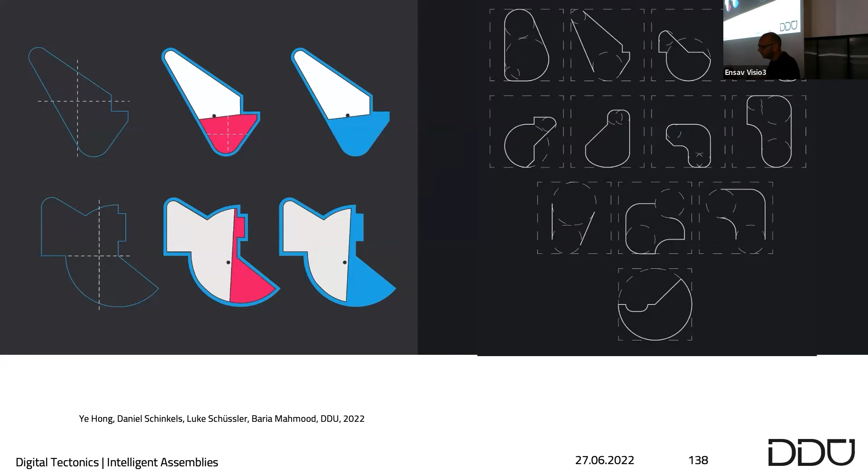So if you see them from the other side and you consider them as being massive, you would be surprised by their behavior, because the center of mass is in a location you don't expect it to be. So this is students designing the behavior of an object by placing the center of mass in weird locations. We are also interested in interlocking these structures, dry joining them. So what is the logic behind them so that they fit together in different ways, and also that they might be walking and rolling around to form different kinds of assemblies. And if that's possible, then you can come up with various aggregations, how they could form a structure.

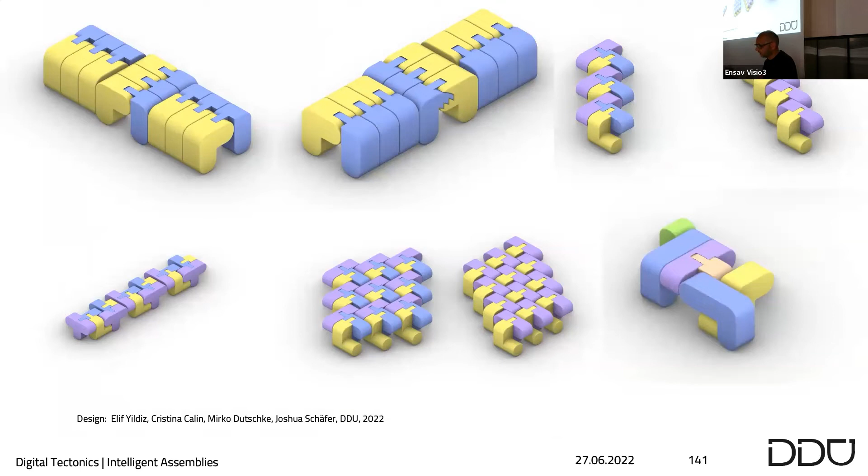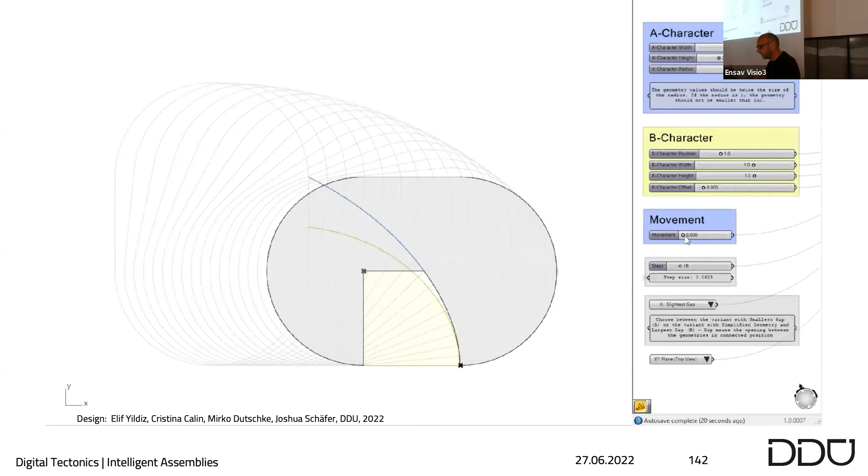And what's interesting is that suddenly this moment of rolling things into each other requires certain geometric features that prevent two elements that meet from colliding, or from not being able to be put together, because this fillet side of the yellow block needs to be there for the gray one to slide in. So these are parametric investigations that our students are currently doing. And then that leads to these kinds of weird objects that come together in certain movements and then roll out again and reconfigure with other elements digitally, but then also physically.

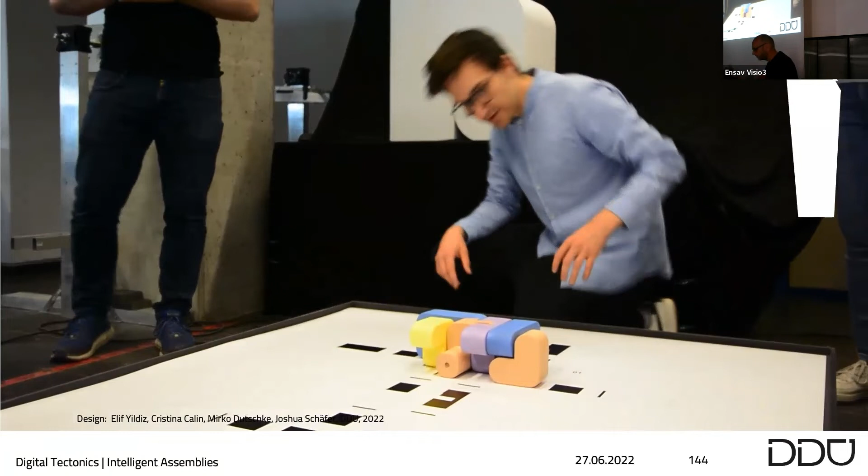It's always important to combine the digital work, of course, with the physical manifestations. And you can see it's always a little bit more tricky in the physical reality than in the digital one. So this group is currently busy with the robot doing serial production of the elements with this big frame rotating around, with the aim to create walking, dry joint, reconfigurable elements that allow people also to interact with, and that allow building elements maybe to exceed the lifespan of a single building, but travel through time and space. And this is where we are right now.

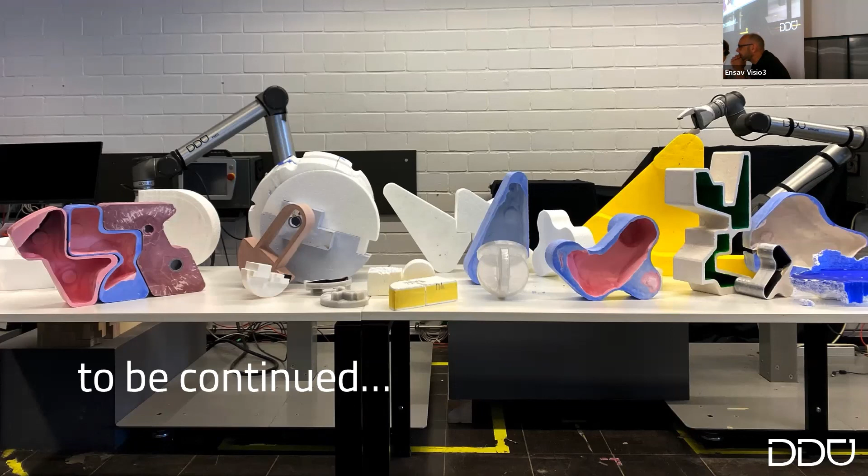So that's also why we created the Fab Lab here in Versailles, so that you guys are closer again to making, understanding, and maybe altering the ways we see it. In this architecture university, you're not going to challenge all the regulations. But once maybe there's an idea, you start doing something, it gets to a next level, you start to do interdisciplinary collaborations with other universities. And then maybe slowly you can change things. It takes time, huh? And it's true.

That's also why we do these lectures, because you guys should be inspired by seeing other things, what is happening around you, and not get your head stuck in the sand and not see anything, because there is really a lot happening at the moment, all over the world. If it's in China or in Germany, there's actually really a lot of things.

And the whole process of building is going to be disrupted in a way, because of materials that are not there anymore, because the Chinese, in all their factories, buy 50% of all the robots worldwide. They took over KUKA, the robotic maker. So if you go to a regular factory floor now in China for making interior stuff and all this, half of the things are all robotic. So we're just behind at a certain point, and it's going to be interesting. I think you live in very exciting times.

Look at your cell phone. We were born in an age where there was no cell phone, and my cell phone now is probably 1,000 times faster than what my computer was in the 90s, and with more capacity on this little iPhone. Yeah. So I told you already, I bought the last one because you can do 3D scanning with it. So I think you guys live in fantastic times.